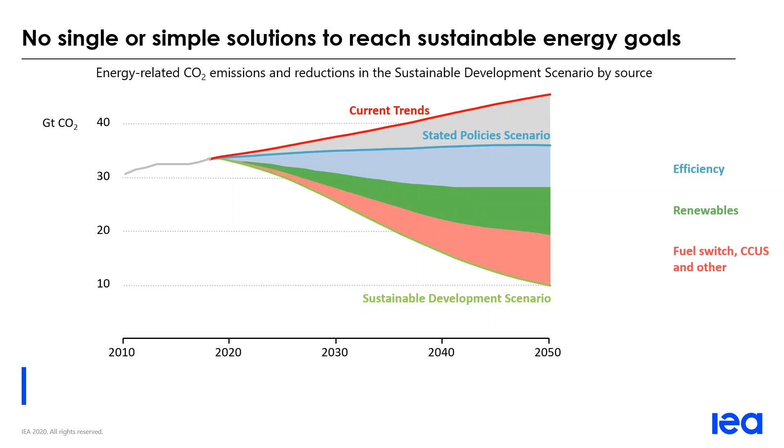We're far from reaching our international targets on climate, air pollution and access, and that's the reason why the IEA has been carrying out country-by-country analysis of pathways that could lead to meeting these targets based on each country's specific policy preferences, resource availability, and societal preferences. Of course, this needs stronger action in 3 key areas: energy efficiency, renewables, and fuel switching, including CCUS and other fuels. And relating to the title of the slide, there are no single or simple solutions, but there are areas we can work on in a targeted manner.

And if you look at the graph in the green area, you can see a visible contribution of renewables, wind, solar, biofuels, other renewables. And underneath it, you also see a significant contribution of the value of fuel switching, of electric vehicles, and of course, energy efficiency that helps with this. And if we really are serious about meeting these targets, then it's important to accelerate the deployment of such important solutions to make a significant contribution.

If we continue as we are currently, this leads to electricity demand of about 6,200 terawatt hours, which is roughly equivalent to China's electricity consumption in 2017, just to give you an idea of the magnitude of the electricity demand. And it should be said that this is assuming an inefficient space cooling. If we take actions now to improve the efficiency of this space cooling, we can reduce this demand to about 3,400 terawatt hours, so it's almost halving the energy consumption. So it is a challenge, but it's also an opportunity.

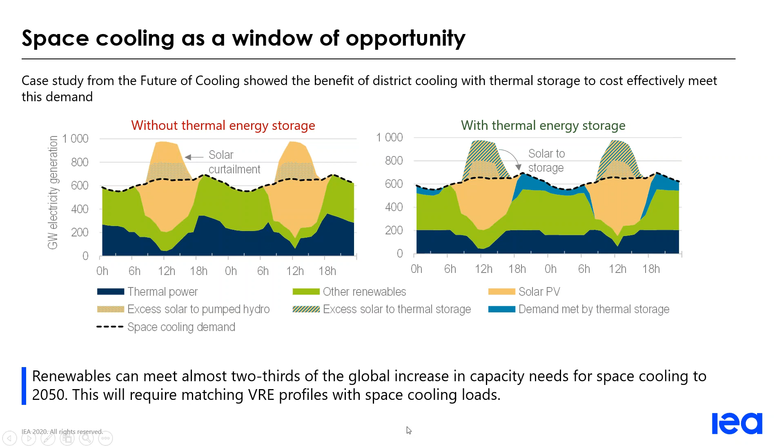Now, looking at transport electrification, if we can move to the next slide. These are some figures of deployment of EVs from the Global Electric Vehicles Outlook, which projects two scenarios. One of them is the New Policies Scenario, basically expecting that by 2030, deployment of EVs will be around 135 million vehicles around the world. And with the EV30@30 scenario, we expect roughly 250 million electric vehicles deployed around the world. This comes, of course, with fuel switching, but also with an increase in electric demand. In the new policy scenario, this is 640 terawatt hours by 2030 of additional electricity demand. If you consider countries like France or Germany today, their demand is roughly under 600 terawatt hours, so it gives an idea of the scale.

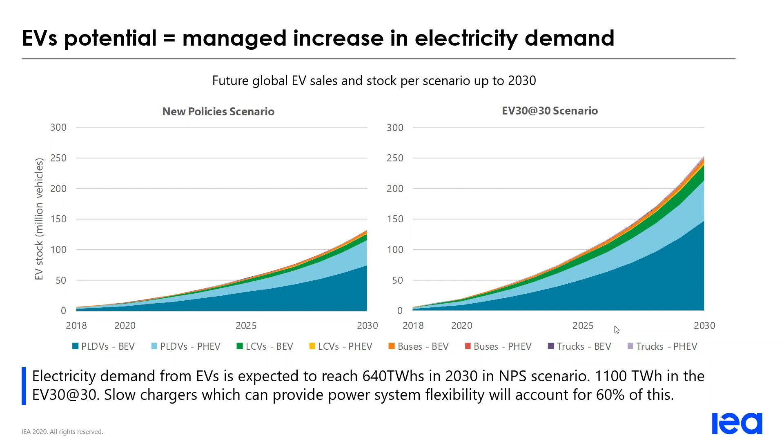Moving on to the next slide, one area where we have identified this potential is in an analysis we did for the China Power System Transformation Report, where we modeled the power system in China in 2035 according to the Sustainable Development Scenario. And here you can see the potential of optimizing EV charging to reduce peaks and increase renewables penetration.

Basically, here I have two sample weeks, one with minimum net load and the other with peak net load. And you can see the difference between the original net load, which is the blue dotted line, and the green continuous line, which is the net load with smart EV charging. In both cases, you see that it contributes to a reduction of the ramping requirements. It also contributes to better operation of the thermal plants that run into less minimum load constraints.

And particularly, one of the significant findings is that fully optimized smart charging leads to a 14% reduction of the original load, which translates into about 165 gigawatts. Of course, this is a modeling exercise where this is an upper end to the total flexibility you can get, as you're assuming that the full fleet of electric cars in this scenario is being used in an optimal way to balance the load.

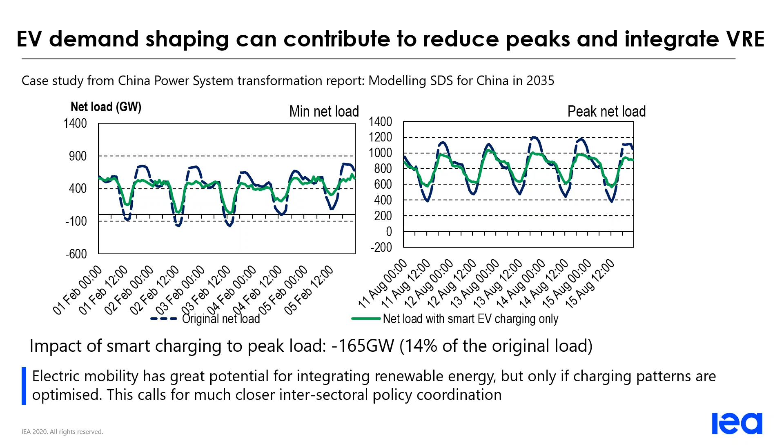And of course, to really make the most out of this potential, you need intersectoral policy coordination, on the transport side, power system, retail rates, and other bits we'll see later. Moving on to the next slide, so far we have only seen the system-wide impact. And something that we're finding with the deployment of EVs and other distributed energy resources is that the greatest impact is felt at the distribution level.

Now, until today this is considering only the deployment of distributed energy resources and solar PV. The question is what happens in the future as we have more EVs, more distributed batteries and more PV being deployed. A recent study commissioned by distribution network operators in Germany found that from now to 2035, if we continue planning the networks as we do now and assuming current operation patterns, this would come with a total investment required of about 36.8 billion euros.

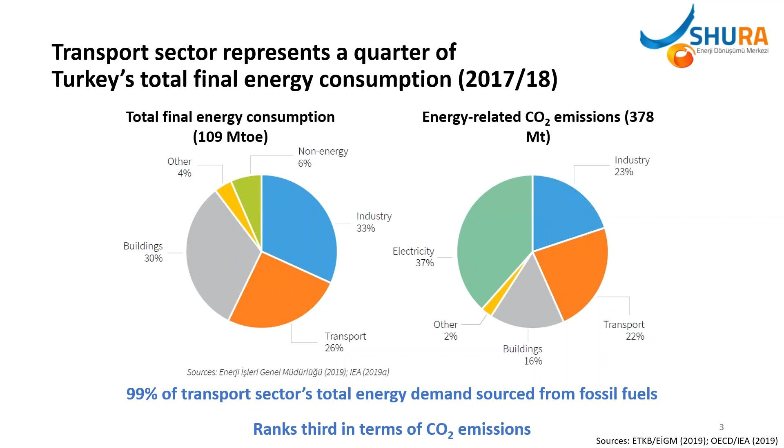And within the G20, Turkey has relatively low per capita transport emissions compared to the rest of the G20 countries. However, in terms of the growth in percent in the past 25 years, it ranks fourth after China, Indonesia, and India. So from an emission perspective, it's a rapidly growing country, which will eventually reach other G20 country levels in the coming years. Next slide, please.

In the scope of the study, as I mentioned, two scenarios have been investigated. Only passenger electric vehicles have been looked into. We looked into also 4 metropole and 4 rural regions within 4 distribution grids. As you can imagine, each distribution grid is quite different in terms of characteristic structure. So we chose quite different grid examples for this study. And for each pilot region within these grids, we looked into different EV driving and charging behavior possibilities, as well as different charging points, technology types, and locations. We connected this distribution grid modeling with GIS-based modeling to place the charging points in different locations. I'll give some examples of that.

Eventually, we had 16 million scenarios in this analysis because of all these different probabilities, and we boiled that down to 16 scenarios at the end for 4 seasons and 4 full days within each season, split into metropole and rural regions. And we looked into overloading, voltage violation, capacity factor of distribution grids, and additional investment needs to see how 2.5 million EVs can be integrated into Turkey's grid. Next slide, please.

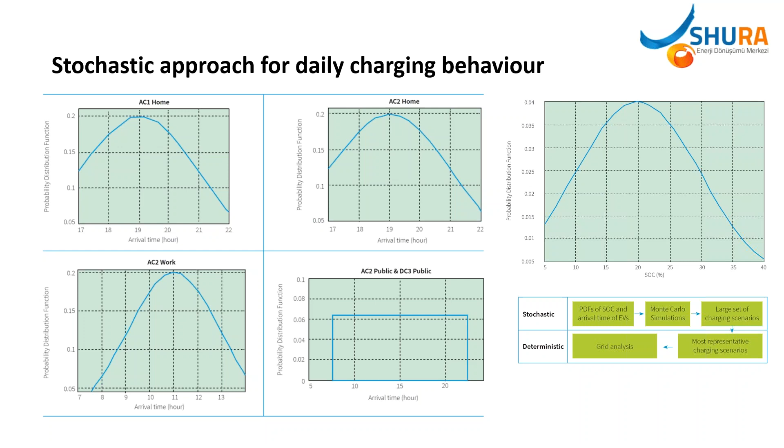Next slide, please. We've tested the impact of EV integration on the number of problems at the low voltage and medium voltage distribution grid. So number of problems on overloading, number of problems on voltage violation. And you see that, for instance, in Kartal, which is the urban area of Istanbul on the Anatolian or Asian side, there have been 6 problems when there's public home-based charging, and less when there is home-based charging support.

And in Şile, which is a relatively rural area in Istanbul, there are also several problems. Different problems in different regions. There is no consistent output, but to give a perspective on the number of problems, this is quite a limited number of problems throughout the year one distribution grid could face. So it's actually quite a reasonable and a positive outcome from the perspective of EV integration. And I'll show a bit on the investment side.

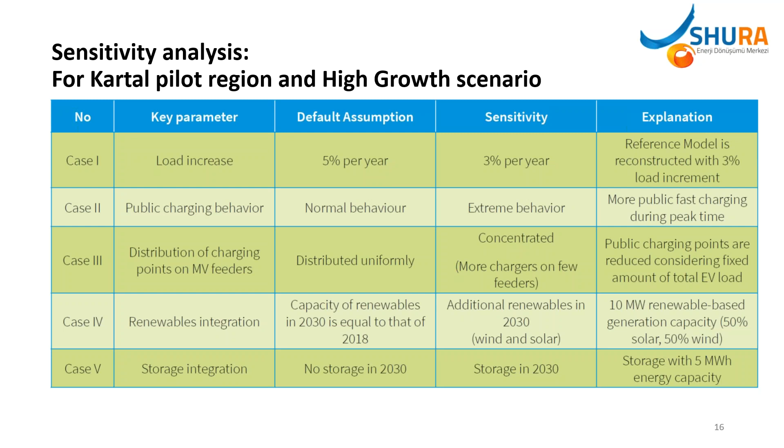And we did a sensitivity analysis to reduce the electricity load from 5 to 3%, so less investments. We grouped the charging stations. We looked also into renewable and storage integration. And if you look into the next slide, I'll try to be a bit quicker here to summarize. Basically, when the demand growth decreases, so there's less investment in the distribution grid, on the bottom you see that the problem number basically doubles.

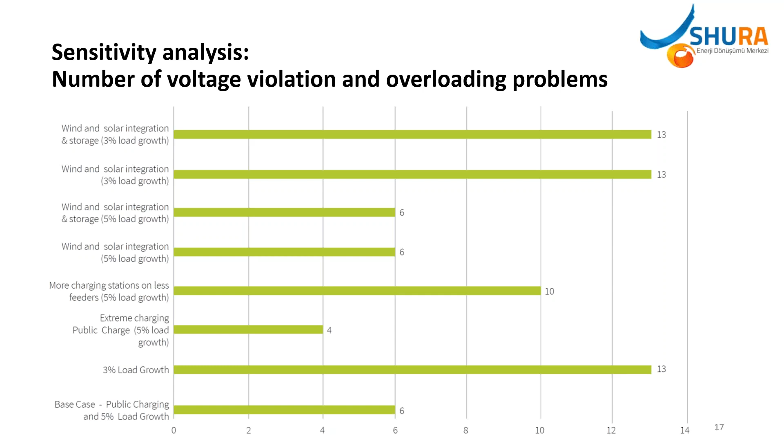One favorable outcome was, if you are to have fewer charging stations at public places and you place them more strategically, it also implies that the charging is done more efficiently and more optimally, so that reduces the problems from 6 to 4. I can go deeper into these results if you have questions, and maybe the next one, and then the next one, please. So let's look at the final results and key takeaways. The next one. To conclude, if you can just click on all of them.

So from this analysis, we were able to draw 7 priority areas for deployment in Turkey, primarily for the Ministry of Energy and Natural Resources, but also other public institutions. There's a need to accelerate the market for EVs and charging services in parallel. Smart charging mechanisms, especially home-based charging in the case of the study, for load management was quite favorable. There is no single region where the same measure applies to solve the problem number, so region-specific measures are needed.

Different business models will need to be developed for both the charging infrastructure companies, but also for the distribution grid utilities. There is a must to continue the planned investments in the distribution grid in line with the growth in electricity demand. There is a clear synergy which needs to be utilized between renewable energy, energy storage and EV charging. And from a national perspective, if Turkey wants to domestically produce its EVs, the benefits of this need to be assessed hand in hand. So that's all from the case of Turkey on EV integration. Thank you very much.

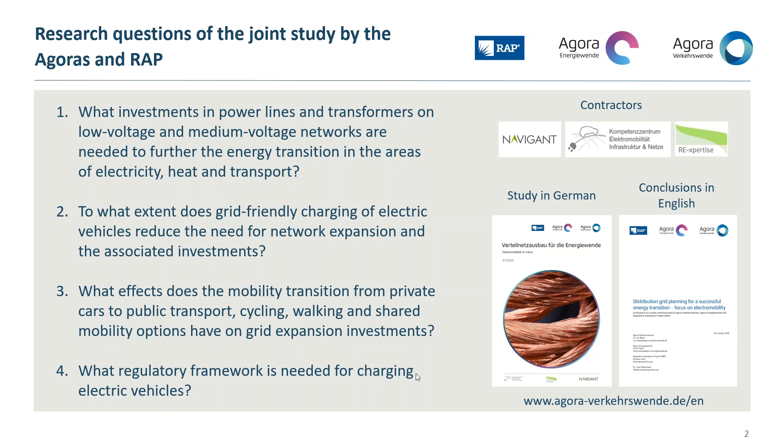And the fourth question, what regulatory framework is needed for charging electric vehicles to really get such a smart charging environment? You can download the study in German, and you can also download conclusions in English from our website.

Next slide, please. So let's have a look at the scenarios. As I said, we can't separate the three sectors, but I will focus on the transport sector. We have two scenarios for the years up to 2030. 6 million battery electric vehicles in scenario F1, 15 million in scenario F2, that is the market ramp up. The government's target is 7 to 10 million electric vehicles. So we wanted to know what even a very quick market ramp up would look like in grid expansion investments. And you see the assumptions as to PV and wind onshore below that, and also to electric heat pumps.

For the year 2050, we then have two scenarios. One where we have a continuation of today's transport system, 45 million battery electric vehicles, which represent the full fleet of cars in Germany, which is currently at 47 million or so. And the other scenario, M1, having 30 million battery electric vehicles, which then also represents the full fleet of cars in Germany. You can't see in this slide that we also have 90,000 buses included in the modeling. What we don't have is the freight transport. So this whole study modeled passenger transport on streets. Next slide, please.

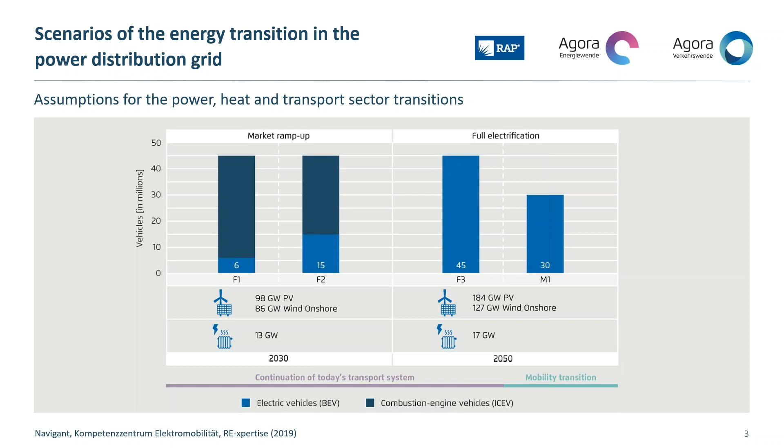And the problem then, of course, is if at 7 o'clock, after 1 hour or so, you go to the gym or whatever and take the car, then there is no time for shifting the charging process. So it's smart charging, but it's limited. So that's why we looked at Smart Charging Plus. Next slide, please.

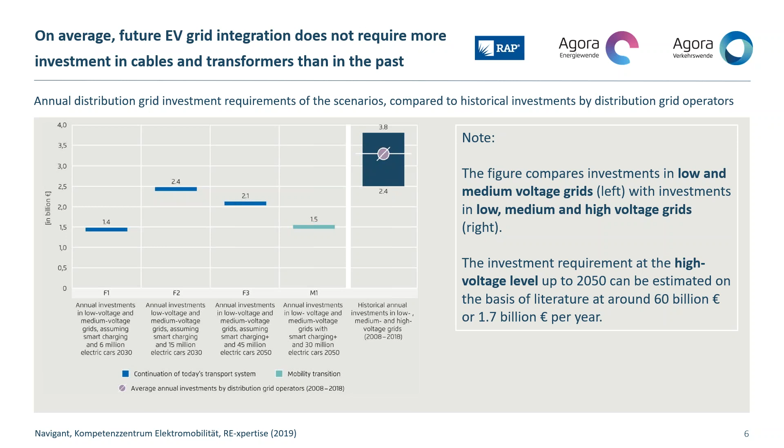The next thing we say is electromobility finances the expansion of the distribution grid until 2050. To be more precise, electromobility can fully finance the expansion of the distribution grid in terms of lines and transformers. I'm not referring to information and communication technologies, the smartness actually, for the electricity, the heat, and the transport sector in Germany until 2050. So how do we explain that?

We have 45 million electric cars in 2050, and they increase the electricity sales by around 120 terawatt hours. Today's grid charges are around 7 cents per kilowatt hour. And if you reduce that 7 cents to 4 cents per kilowatt hour by 2050, those 45 million electric cars would bring in up to 75 billion euros, and those 75 billion euros would be needed for the scenario 45 million electric cars with Smart Charging Plus. So it's a continuation of the current transport system, but it's with Smart Charging Plus. Of course, the final contribution of electromobility must be determined politically, which brings me to the next slide, please.

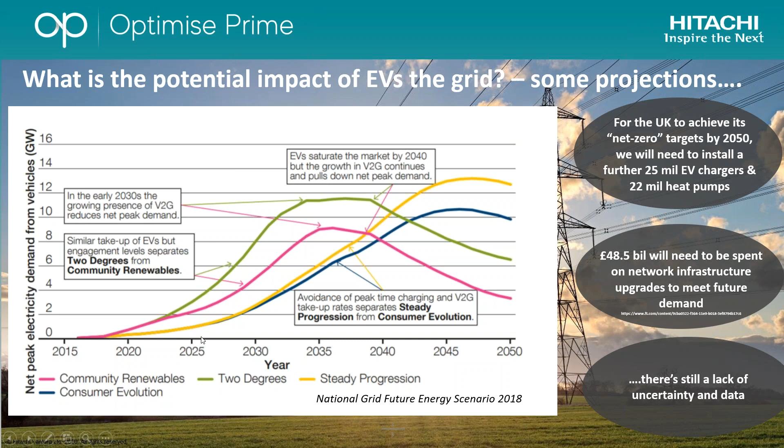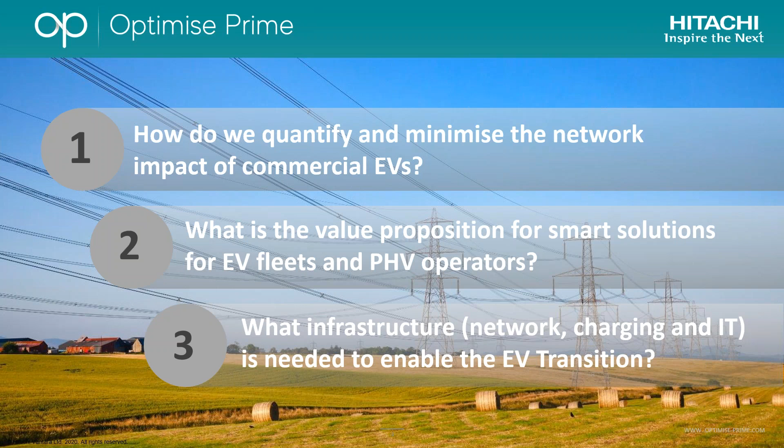Next slide. So from a research perspective, there are main questions we're trying to answer. One is understanding how we quantify and minimize the impact of commercial EVs. What's the value proposition for smart solutions for both the fleets and the private hire operators? And what's required in terms of infrastructure, IT and charging to enable this transition. Next slide.

So our approach is, we believe we need to take a whole system view to really understand these requirements. To do that, we need data and cross-industry collaboration from a collaborative ecosystem of partners. We're working with several partners from energy, transport mobility, as well as distribution technology, to openly make that data available to each other.

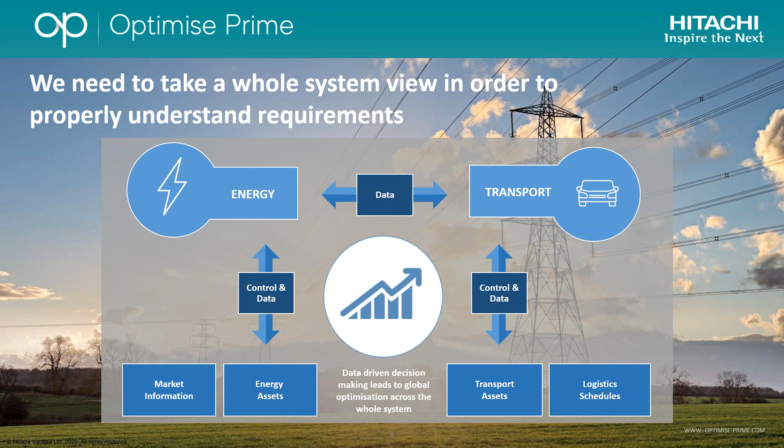To address this, we're also utilizing IoT to enable data exchange between siloed areas of activity. IoT also leads to optimized and automatic decision making, which can result in more benefits at a system level than the sum of the savings at each individual level. Next slide.

So for our depot-based fleet, we're working with Royal Mail. Royal Mail is the largest commercial fleet operator in the UK. They've got over 46,000 vehicles across 1,700 sites. You can do the next slide.

And what this trial is aiming to do is address several different problems for both the network operators as well as the fleets. And those include customers over-specifying connections and not utilizing network capacity efficiently. They tend to do planning, which tends to be done on a worst case scenario basis.

For the depot fleet operators, potential network constraints could result in them not being able to actually electrify their vehicles, in terms of the cost for the infrastructure that's needed for that could cost more than the vehicles themselves. And then also complexity with depot design and planning.

So if you think about Royal Mail, they've got 1,700 sites, and I think originally it took them about 3 years to do 70 vehicles. So if you imagine, with 46,000 vehicles across 1,700 sites, how much time that would take for them to roll this out. This trial, what we'll be doing is we're going to install EV infrastructure at depots throughout London and the southeast of England.

We'll implement something called profiled connections that control the amount of network capacity used by each depot throughout the day. And then we're also going to use optimized charging in order to maintain that profile and reduce costs for the depot while ensuring vehicles are charged when they're needed. Next slide.

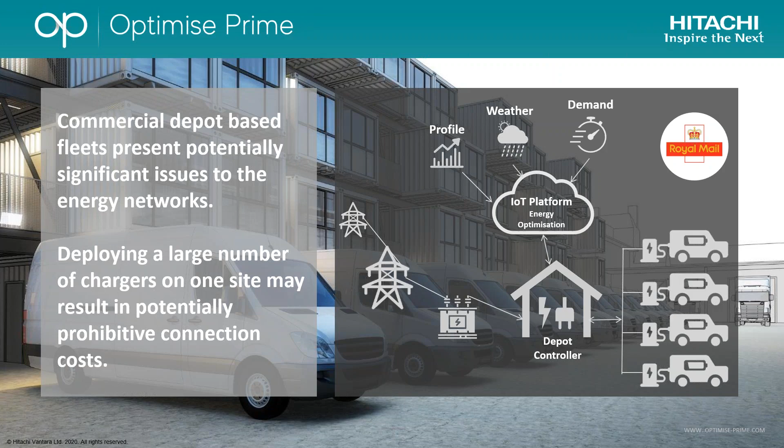So this is just an example of some of the modeling that we've done. If you can click onto the next as well. Part of this project will also be designing a depot planning tool. So again, trying to simplify that process for the fleets, as well as helping the network operators in terms of being able to respond faster to requests for connections or quotes for connections.

And this is looking at different inputs for the fleet operators so that they would understand what type of connection they should be requesting based on their actual usage, based on any type of behind-the-meter asset solutions that they have that could have an impact on that. Next slide.

So we're talking about the profiled connection. Today, the current situation is most of these organizations tend to base it on a worst case scenario. And if you look at a scenario where they're not using smart charging or they're not optimizing that charge throughout the day to minimize what that capacity demand is.

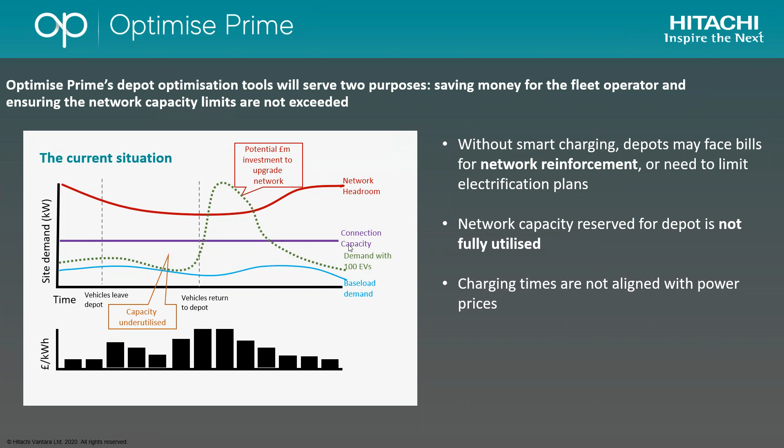So what we're aiming to do with the depot optimization system and the profiled connections would be to look at how the fleets are actually utilizing their vehicles in terms of when they can charge and when is the most effective or efficient time in terms of cost for them to charge and when there's capacity on the network. So this is really looking at two things. It's around helping the fleet operators charge more efficiently, as well as ensuring they stay within the limits of that profiled connection.

Next, please. So the other trial we'll be doing is with Centrica, with the British Gas fleets. And this is going to be for the charge at home. Centrica is the largest energy supplier in the UK. They operate the third largest fleet with about 12,000 commercial vehicles. Centrica will be providing data for vehicles charging as well as EV aggregation services for this trial. And next.

So again, some of the challenges that we're going to be trying to solve for the networks and the fleets include the fact that networks right now really don't have visibility of commercial charging on the domestic connections and what impact a commercial load will have on that. So if you could imagine, in a world where, let's say, charging at a depot is too cost prohibitive for organizations, and if they decided to suddenly have all their employees charge those vehicles at home, what kind of impact that could possibly have.

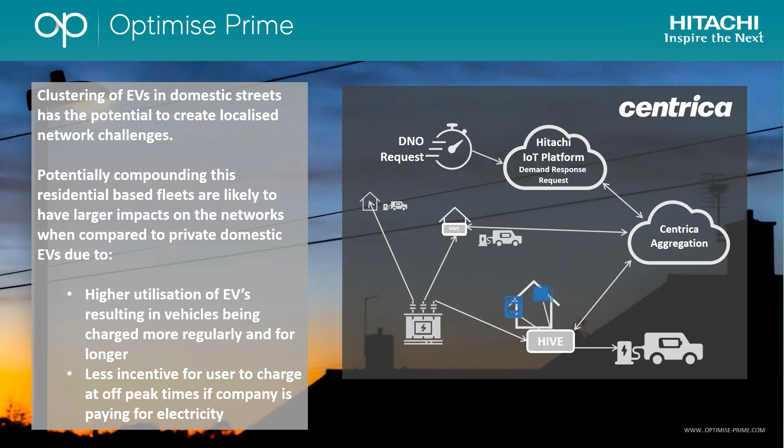And for the fleet operators, there's a complex process needed for employees to claim back charging costs. And another thing too is residential tariffs today are more expensive than commercial tariffs. So with this trial, we're going to be monitoring charging of home-based commercial EVs to help understand the extent of the issues faced by the networks. We'll be trialing demand response to alter charging patterns when the grid is stressed. And they're also going to look at technical and economic solutions to make it easier to split that commercial and residential power usage. Next.

So the third one is with Uber, a private hire mobility organization, and it's really looking at that mixed fleet. So it's a combination of: they could be charging vehicles at home, they could be largely relying on public infrastructure, where a lot of times, if you look at charging hubs, that can almost act similar to what a depot would be. Next.

And a key challenge for the networks and the operators is that they lack visibility of the potential demand for this really fast growing sector. And for the private operators, they need availability of charging infrastructure. So Uber's got some aggressive plans in terms of going purely EV in London. In order to do that, they need to make sure that the infrastructure is in place for their drivers to make that transition. The other thing is just understanding what that driver charging behavior is, where they're charging, why they're charging, and how they can help accommodate that better.

So what this trial is going to do is collect anonymized data, the trip data from Uber's EVs across the Greater London area, and then we're going to combine that with the grid data to generate heat maps of charging demand and network capacity. So we'll basically be looking at what that future demand is and the impacts of private hire or mobility operators, and also understand potential locations for where future infrastructure should be placed. Next.

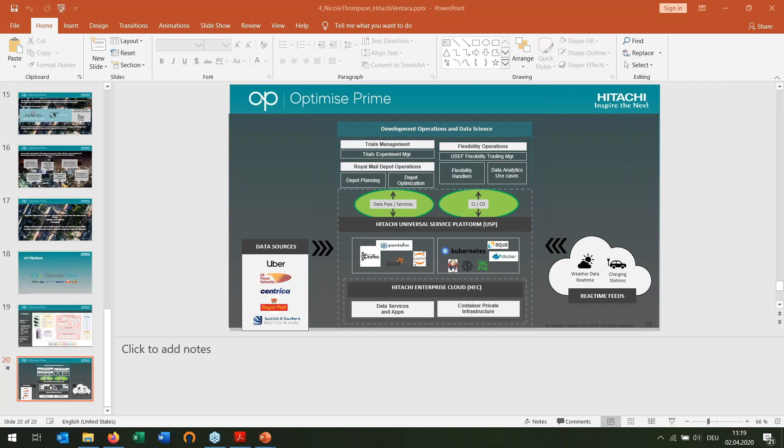And the big question is, what do we win and what do we lose with including carbon in those molecules? The absolute pro argument is obviously that they come with a very high energy density, and I'll get back to that in a second on the next slide. But the other argument in favor of carbon-containing molecules is that you might use the existing infrastructure for natural gas and liquids.

The big counter-argument is you need more energy or you have higher conversion losses in production of carbon-containing molecules, and you need, in the long run at least, to find a sustainable carbon source. So that might be the air with direct air capture or some form of sustainable biomass, if you have it available. And another big con is methane as a particular molecule with a high global warming potential. As long as we continue to use methane, even though it might be attractive to use existing infrastructure for natural gas, methane always comes with a risk of leakage.

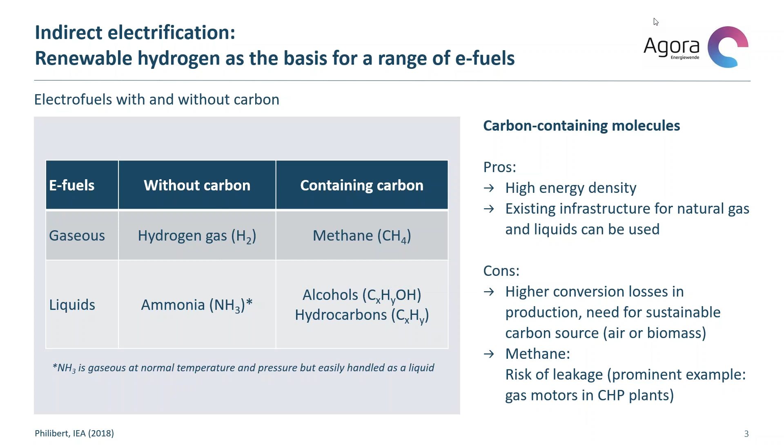And one very prominent example currently being discussed in Germany among, for example, the combined heat and power community is, well, for some gas motors, it's pretty difficult to avoid this leakage. If you try to do so, you may have to invest so much and have combustion after your real process that it turns out maybe too difficult and too costly to actually avoid and mitigate those leaking methane emissions. So that's a problem, and that shows that we should very carefully weigh the costs and benefits of including carbon into our molecules. Next slide, please.

And so the question obviously is, what are the criteria for choosing a certain molecule as opposed to choosing direct electrification? It may have to do with energy density. That's very clear for aviation. It may have to do with high temperature heat, very clear for some industrial processes. But it's always good to ask, is there a direct electrification alternative?

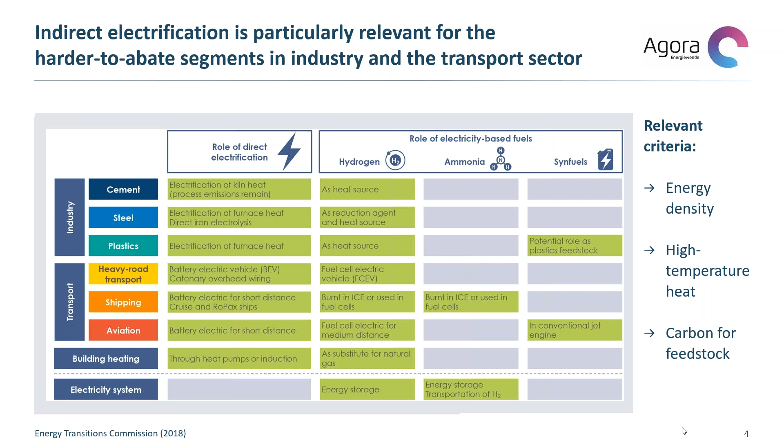Now, this is the primary reasoning why it's a good idea to start with direct electrification wherever it's possible, because to travel the same distance, a combustion engine vehicle would need about 5 times as much renewable electricity as a battery-driven vehicle. And even the fuel cell vehicle doesn't look that great compared to the battery electric vehicle. Obviously, there are other considerations why you would maybe use a fuel cell vehicle, and I'm not going into details here, but the conversion losses as the primary starting point for thinking about the best technology pathway should be a very strong argument in favor of this.

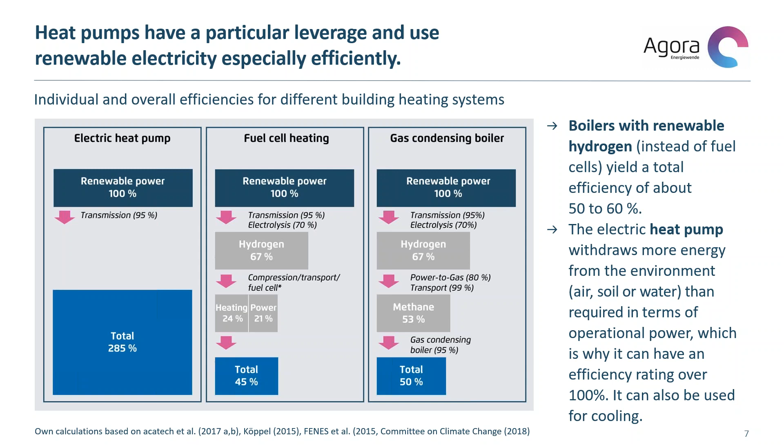But then if we talk about passenger cars, battery-driven electric vehicles are the energy efficiency benchmarks. For buildings, similar, heat pumps have a particular leverage, and therefore they also are the benchmark, and they can also be used for cooling. And then finally, this is all conversion loss and energy efficiency considerations. Let me just say that this is definitely not the only criteria, but it's so strong that the open question for some applications from our perspective is, can those indisputable physics-based disadvantages of electrofuels be more than offset by avoidance of infrastructure cost? And that's in many areas, many regions, a very open question.

And I think we need very good evidence to find solutions and find answers to that question. The question always is, who has the burden of proof to show this? Because the physics is pretty clear about the conversion losses.

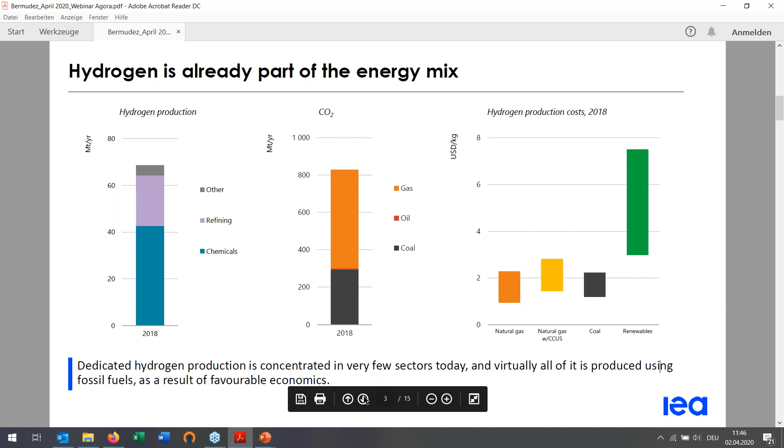Through water electrolysis, we can produce hydrogen, which can be used directly as a fuel, or it can be transformed into ammonia through the Haber-Bosch process, or into a wide range of hydrocarbons like synthetic methane, diesel, jet fuel, methanol, through different chemical processes like methanation, methanol synthesis, or Fischer-Tropsch synthesis. Next slide.

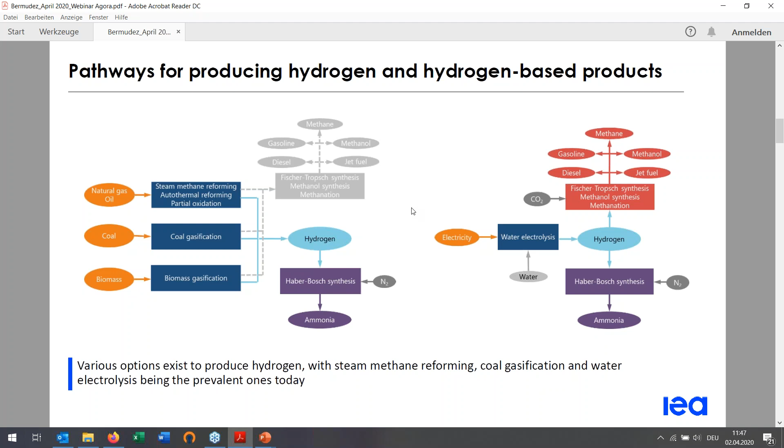The electrolytic routes are costly, as I mentioned, but despite the cost challenges, scale-up is happening for hydrogen production from electricity. Since 2000, we have seen over 200 projects started in operation around the world, and this is especially marked from 2010, when there was an acceleration in the number of projects deployed. Moreover, these projects are getting steadily bigger.

For example, last month, the largest power-to-hydrogen project was inaugurated in Japan with a scale of 10 megawatts. And projects being announced today are as big as 100 or 200 megawatts, compared to an average scale of around 1 megawatt in the last decade. Next slide.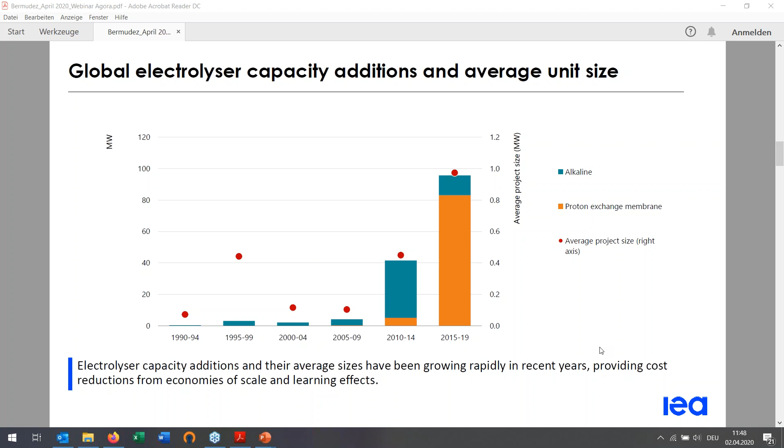The operational management of electrolyzers also presents challenges. In grid electricity, electricity prices vary over time. We have low prices when there is little demand and there is a surplus of variable renewable electricity generation, and high prices when demand is high and there is less variable renewable electricity available.

Although very low or even zero electricity prices may appear to be a very attractive way of producing hydrogen, these typically occur only for a few hours a year, resulting in low utilization of the electrolyzer and thus relatively high production cost due to the impact of CAPEX. With increasing load hours, the CAPEX contribution declines, but at the same time, the cost of electricity rises.

Due to these opposing trends, a sweet spot, I mean, a point where we can achieve the lowest cost of hydrogen production, can be identified. And in the example of the analysis that we performed last year, we can see this sweet spot between 2,500 hours and 6,000 hours of operation, more or less. Next slide.

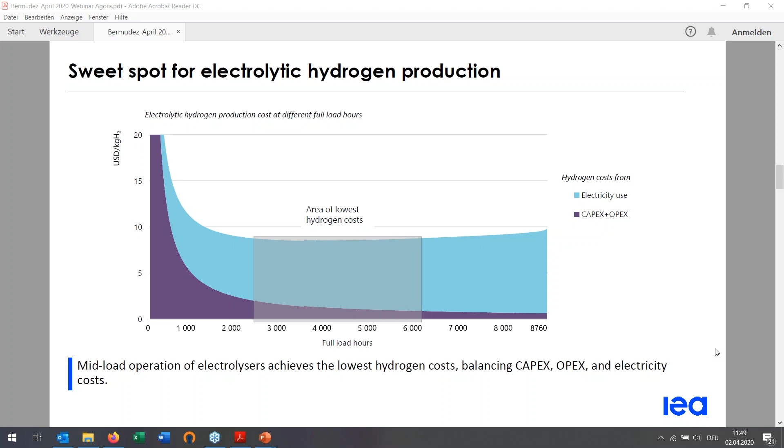However, even with optimized operation conditions, the price of electricity is and will remain the main cost driver for electrolytic hydrogen competitiveness. From the analysis that we performed last year, it was determined that low electricity costs in the range of $10 to $40 per megawatt hour are required for electrolytic hydrogen to become competitive against hydrogen produced from natural gas with CCS, when we consider a conventional range of natural gas prices.

The introduction of carbon prices would enable competitiveness of electrolytic hydrogen with higher electricity prices, although the impact of CO2 penalties on the price of hydrogen from natural gas when it is coupled with CCUS is relatively low. Next slide.

Scale up is also happening in projects for hydrogen production from dedicated renewable electricity, although these projects are still mostly relying on government funding. Scale up is needed to become commercially viable. If so, we can see some remarkable opportunities around the world. From this geospatial analysis, we have found that costs as low as $1.6 per kilogram can be achieved in some regions in the long term, showing that hydrogen from renewables can become competitive with fossil fuels in certain situations in the future.

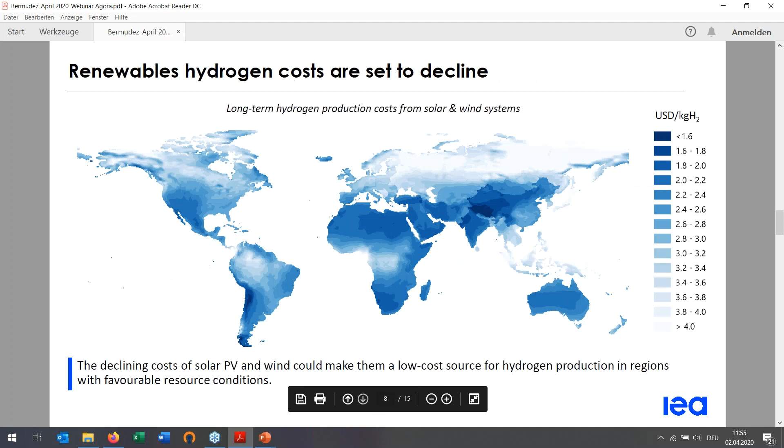No, the next slide, please. Next one. That one.

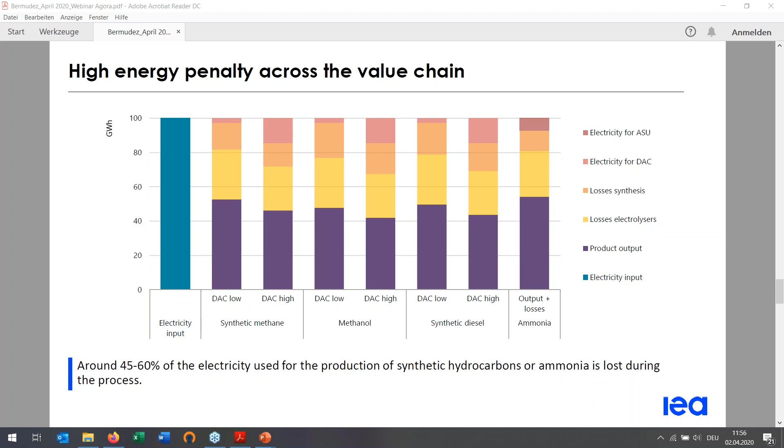So finally, another alternative regards hydrogen-derived products. Synthetic hydrocarbons and ammonia offer an interesting opportunity to decarbonize certain transport modes like aviation and maritime, where hydrogen has limited applicability due to its low volumetric energy density. However, the production of these fuels involves a complex value chain that comprises several processes, one after the other, and along this value chain, efficiency losses accumulate, resulting in low overall energy efficiencies, which lead to high production costs. Next slide.

In this slide, we can see a comparison of the current cost of several hydrogen-derived fuels, the potential for cost reduction in the long term, and the fossil fuels that these hydrogen-derived fuels aim to replace. We can see that as a consequence of the low overall efficiencies, there is a high impact of electricity costs in the final price of these hydrogen-derived fuels, and that it will remain so in the long term. Only in the case of ammonia, in the really long term, it could become competitive with conventional ammonia production.

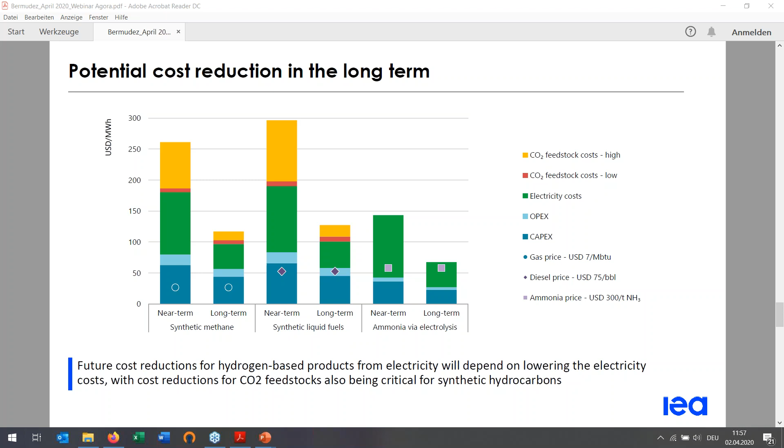Thinking about synthetic diesel or synthetic methane, a combination of both low electricity prices and high carbon penalties are needed, again, for making these fuels competitive. In this example, we can see that at an electricity price of $40 per megawatt hour, a carbon price of more than $200 per ton of CO2 would be needed for making synthetic diesel match prices with conventional diesel, whereas more than $350 per ton of CO2 would be needed for matching prices between synthetic methane and natural gas. Next slide.

I would like just to finish with the 7 key recommendations that we identified in our report for scaling up hydrogen, which are establishing a role for hydrogen in long-term energy strategies, stimulate the commercial demand for clean hydrogen, especially in those sectors that are already demanding hydrogen, so trying to replace current demand with low carbon hydrogen. And address investment risk for first movers, because the first movers are going to face quite important costs that will involve a lot of risk.

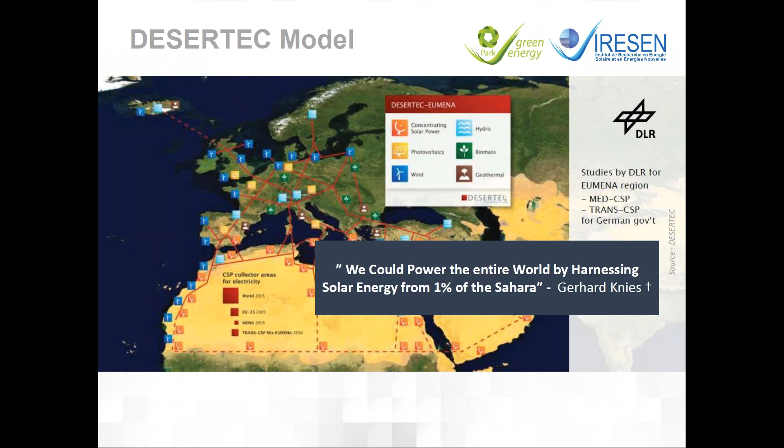But the idea that I want to highlight here is that now, as the previous speaker has spoken about, we would like to review this vision of Desertec into another version that will be more inclusive for countries on both sides of the Mediterranean, but also with more added value in the south of the Mediterranean. Next slide, please.

So about the vision, we in Morocco would like, hopefully in 10 years, to be one of the leading countries exporting high added value green or industrial molecules. We find this vision quite realistic because of the urgency of climate change. So we think that there is a very convenient context now for deploying this economy at larger scale.

We have also very consistent signals that Power-to-X is considered by many countries such as Germany or the Netherlands as a very quick way to achieve zero emission targets. And this will probably create positive conditions for the deployment of the international market. Since Morocco also has a nice renewable potential, as shown by previous speakers, we would like to position ourselves as a key partner for countries that would like to deploy or import PTX products. Next slide, please.

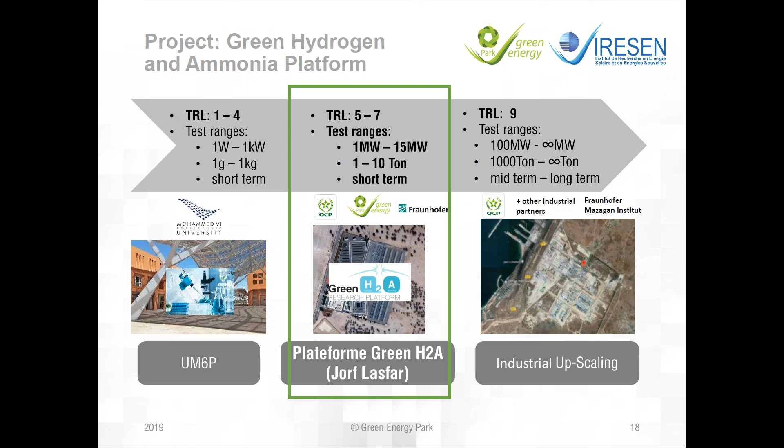Next slide, please. So in terms of TRL, those are details, but we would like, as we have developed these platforms previously on the Fraunhofer model, to be a bridge between the academia in terms of TRL and also the industry. Next slide, please.